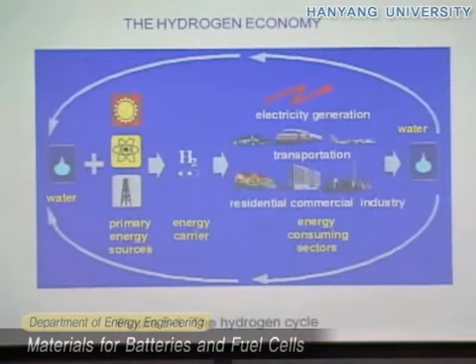Okay, this is the main reason, because among the various possibilities to pass... Okay, among the various routes that we have to renew our energy and passing from a polluting and not very efficient way like today, that we're using oil for producing our energy, hydrogen is one of the expected alternatives. Why is that?

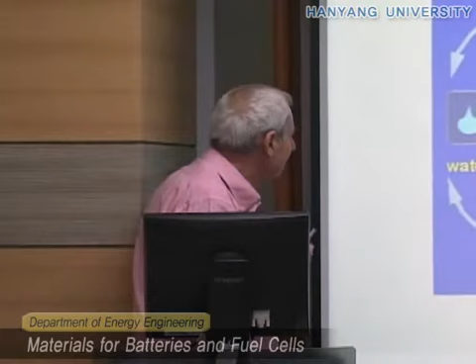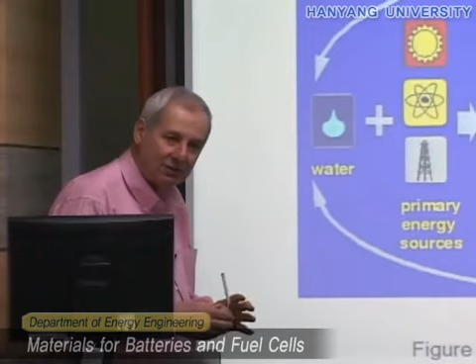Because this is very appealing, as a matter of fact, because we can start from water, because hydrogen is not a resource. We cannot dig into the ground and find hydrogen as we do for oil. So hydrogen is something that we have to produce, and of course you know very well that hydrogen is a part of water. So we can start from water, and somehow decompose water and form hydrogen, and then hydrogen can be used for many applications.

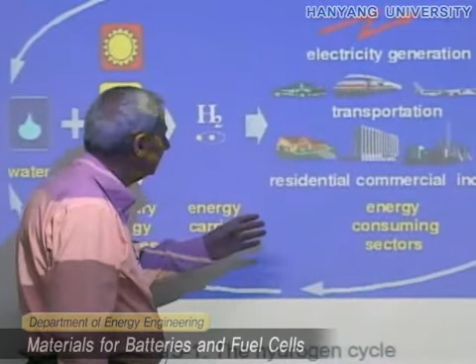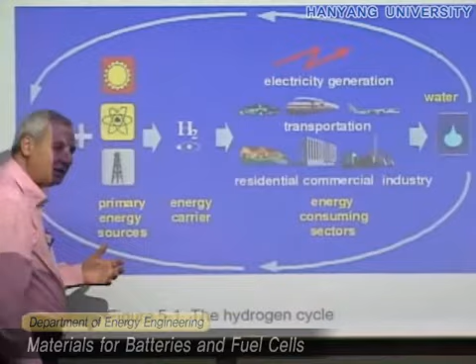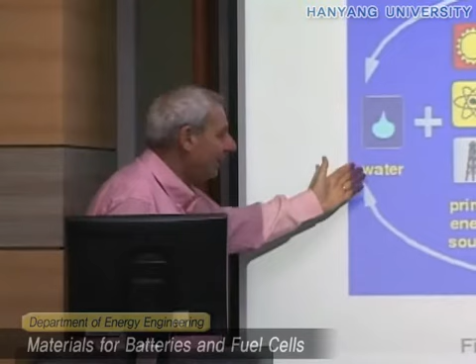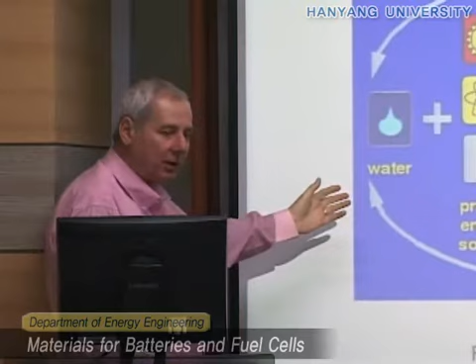You can see maybe automobile, residential, factories, and the most important thing is that when we use hydrogen to form energy, we form water again. So this cycle is very appealing, because we use an element which is abundant in the world. Every country has water, so there won't be any political involvement as we have now with the Arab countries or generally the countries who produce oil. And we don't pollute anything, and we don't destroy anything like we do with oil, because when we use oil for energy, we burn oil, so we destroy it.

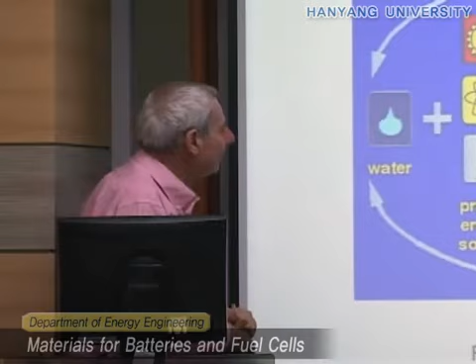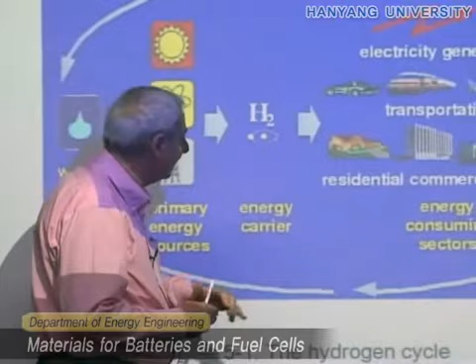But, of course, there are some problems here, and you see that first we have to produce hydrogen, then eventually to store, and then to reconvert. The part that we are interested in is this part here, because the reconversion requires some operation, and a fuel cell can do that.

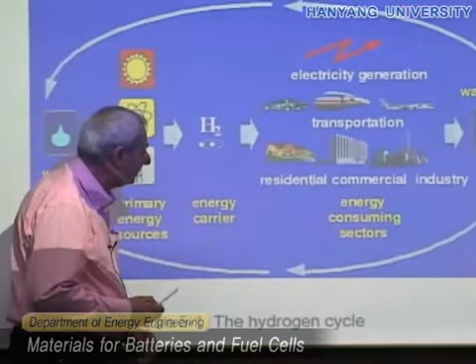So I did summarize the reason why we are so interested in hydrogen, because, as I say, this can give us energy source diversification, and we can use coal or renewable energy for producing hydrogen, as we will see. Of course, hydrogen can be considered as an energy carrier for traditional and innovative energy sources. That means that we can use hydrogen for producing light, or also for driving an electric car.

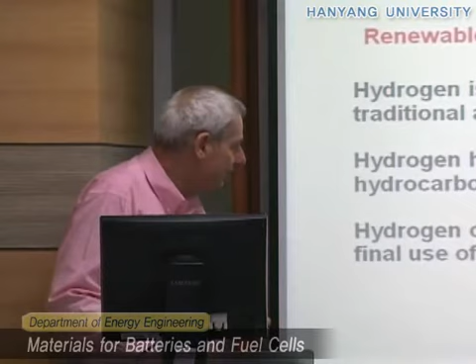Of course, hydrogen is much more clean, green than fossil hydrocarbons, namely oil and coal. And of course, it can be used in transportation, as we will see. But, however, as I say, hydrogen is not a resource. We don't find hydrogen in the world. We have to produce it. This is the first problem.

What does this say? Doesn't go anymore. What do you say? Something wrong? No? The center of what? Here? Okay.

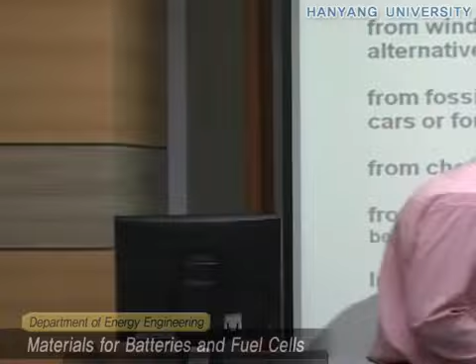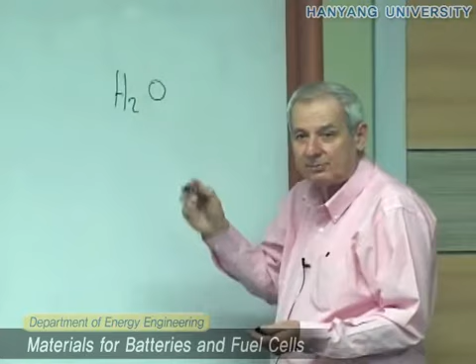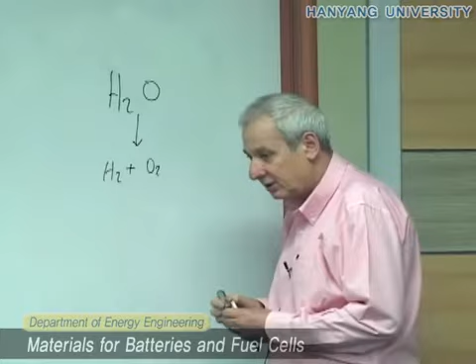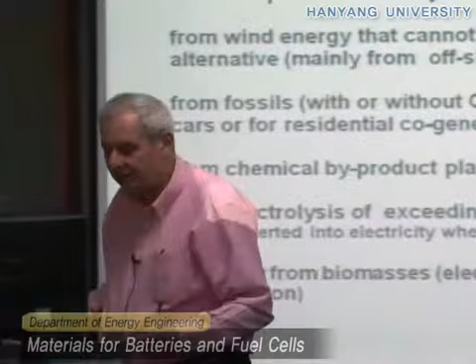Okay, so we have to produce hydrogen, and for doing that we have to decompose water, for instance. But you see, hydrogen likes to be in water. This is the most stable situation. So to decompose water into hydrogen and oxygen, we have to provide some energy. And this energy can be taken from some renewable energy like wind or solar.

And this is a good way. We can also use oil, I mean petrol, but this is not a very good way, because if we burn oil to produce energy to decompose water, we still have the same problem that we usually have with oil energy sources. Because when we burn oil, we always produce CO2. And this is not very good for the environment.

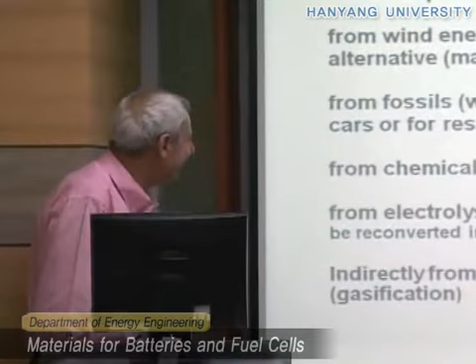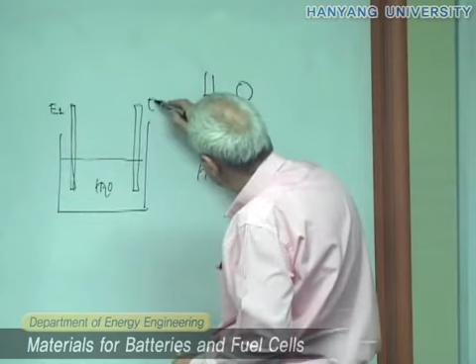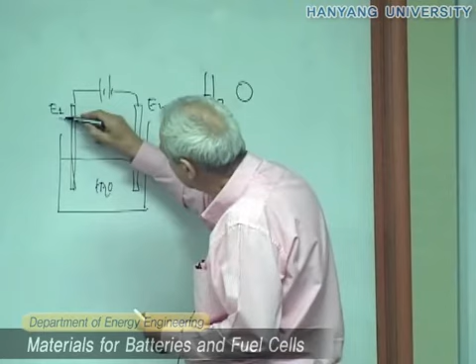The best way, in my opinion, to produce hydrogen is from electrolysis of water. Right? So we can take a cell, an electrochemical cell. Here we have water, okay? And here we have one electrode. Here another electrode. So we call this one E1 or E2. And we need some energy to drive this electrochemical process, and then to produce oxygen here and hydrogen here.

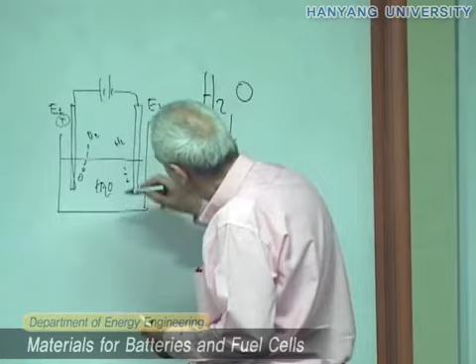Now the voltage which is necessary to produce this reaction is 1.23, theoretical. But then it may become much higher for some problems that we will see pretty soon. So to have a voltage which is not too much higher than this one, we must use some particular electrodes, which unfortunately are based on platinum. So the first problem of this way is cost.

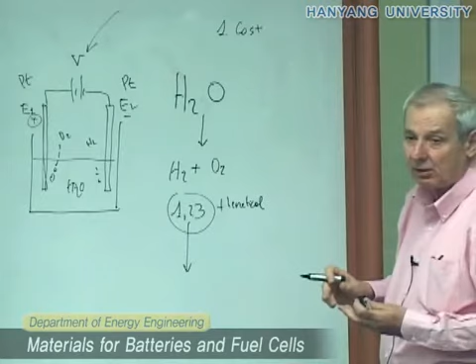Then the other problem is how to produce this voltage. We can do that maybe using oil, but it's not very nice. The best way would be to do that using, for instance, sun. But the voltage of a solar cell is about 0.6. So if one makes some calculation, you will see that the energy efficiency using solar is not that high. So we don't have very many possibilities so far to use photovoltaics for producing hydrogen.

Now you will see here the various ways that we can produce this energy. For instance, we can use geothermal energy. You see, there are some volcanic countries where they have hot water. I think Japan has a lot of hot water. Also Korea has a lot of hot water, I think. There are some places here where I understand you can go have a hot bath. And this can be used, and this is okay, because it's a natural energy.

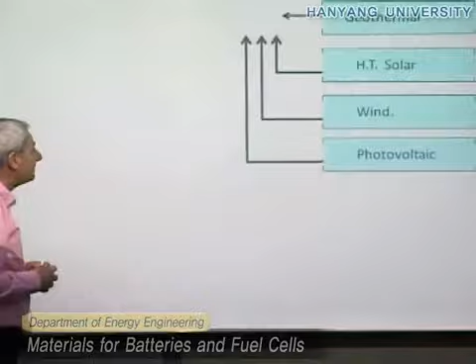Then solar, wind, photovoltaic. This is not photovoltaic, this is thermal solar. So we can use the heat produced by the sun to form the voltage. Then we can use the photovoltaic, the one that I discussed before. Hydroelectric: there are ways you can produce electricity when you have a lot of rivers and waterfalls, and you can use the falls for producing energy. This is okay too.

And of course, you can use the excess of energy. I don't know if you're aware of this fact, but in every country, including Korea, there are some periods of the day where there is a lot of request of energy, for instance, during the daytime. But then this request of energy goes down during the night.

Not so much in Korea because you work too much. You work until 11, I understand. But most people, they don't.

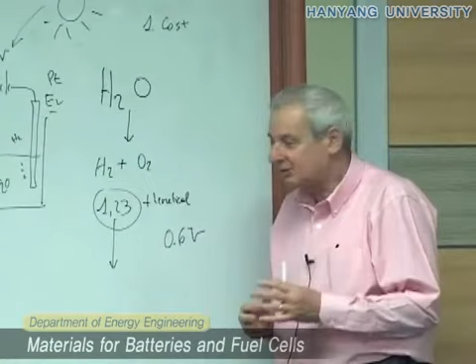So during the night, there is no high request of energy. So this excess of energy can be used for this type of application. And this will be used to produce hydrogen by electrolysis, according to the scheme that I showed you there.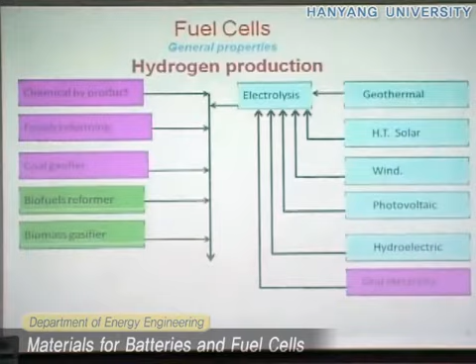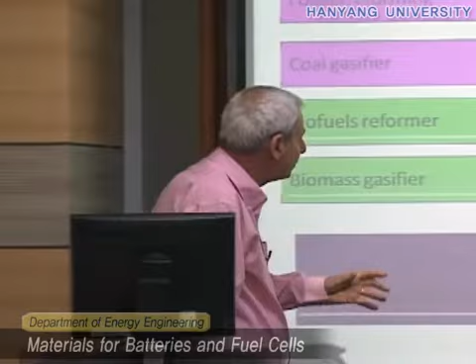But other ways are maybe using the reforming of hydrocarbons, reforming of coal, which is not very good in terms of environment. Now, you can use biofuels and biomass gasifiers, which are good. And then all this hydrogen so produced can be used for transportation, for instance, or other types of utilization.

So, to summarize, the hydrogen cycle requires the accomplishment of three main steps. The first one is production, and I just summarized what I said before. We can have reforming of hydrocarbons, gasification of coal, and electrolysis. Of course, the issues here are, in the first case, emission of CO2, and in this case, it's cost. But we will not discuss this further.

Then, of course, another problem is storage. Because suppose that you want to use hydrogen in a car. We will see that that is possible. But in this car, we use hydrogen as now we use benzene, oil. So the way we transport our energy in the car now is to store some gas, oil, when you go to the gas station. And usually it's not very big. Now you have to do the same thing with hydrogen. Hydrogen is a gas, so you cannot really use a big tank of hydrogen. So you have to find some alternative way of storage.

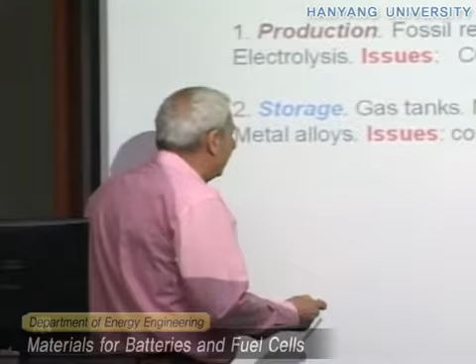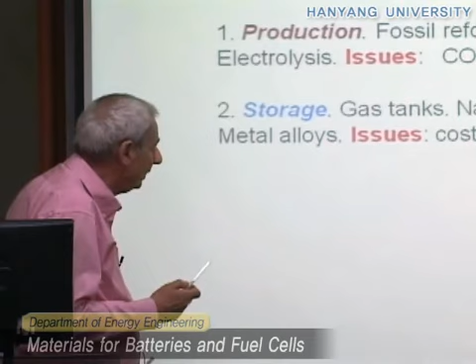And in fact, the most immediate way of storing gas is by tanks, but it's not applicable in some way. And there are some other directions to store hydrogen, which are nanostructured carbons or metal alloys. I won't go into detail on this either, but just to summarize, of course, the issues here are the cost, this costs a lot, and poor efficiency. And this also gives you some safety problems, a big tank in the car.